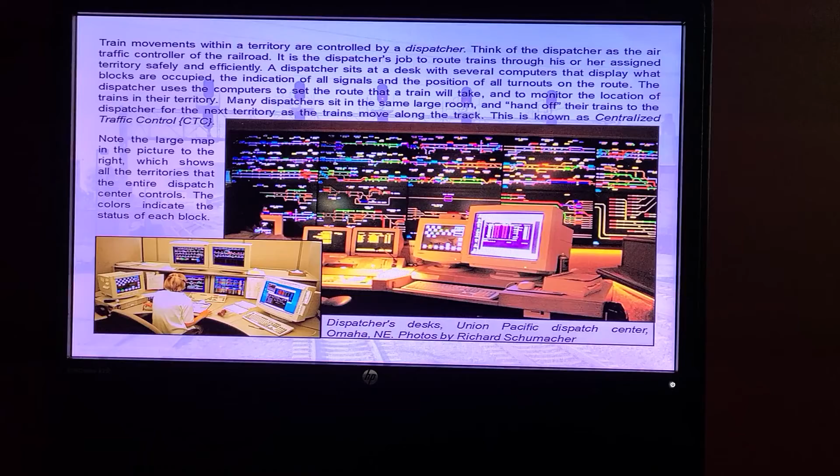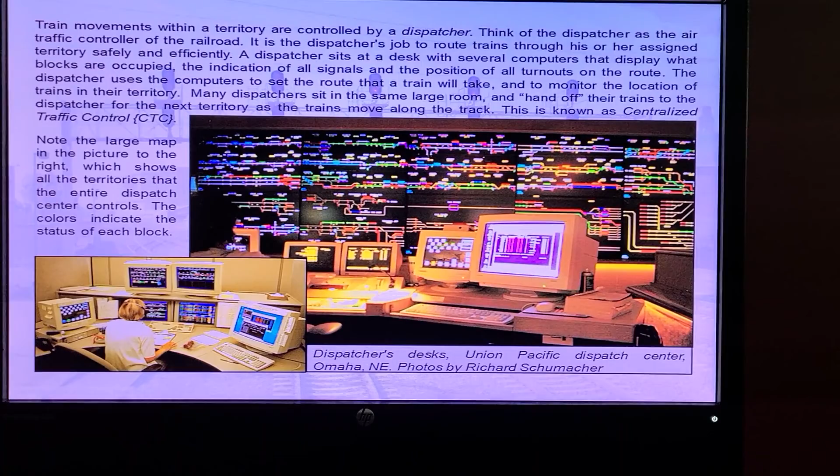Trains are controlled by a dispatcher. Think of the dispatcher as the air traffic controller of the railroad. It is the dispatcher's job to route trains through his or her assigned territory safely and efficiently. A dispatcher sits at a desk with several computers that display what blocks are occupied, the indication of all signals, and the position of all turnouts on the route. The dispatcher uses the computers to set the route that a train will take and to monitor the location of trains in their territory. Many dispatchers sit in the same large room and hand off their trains to the dispatcher for the next territory as the trains move along the track.

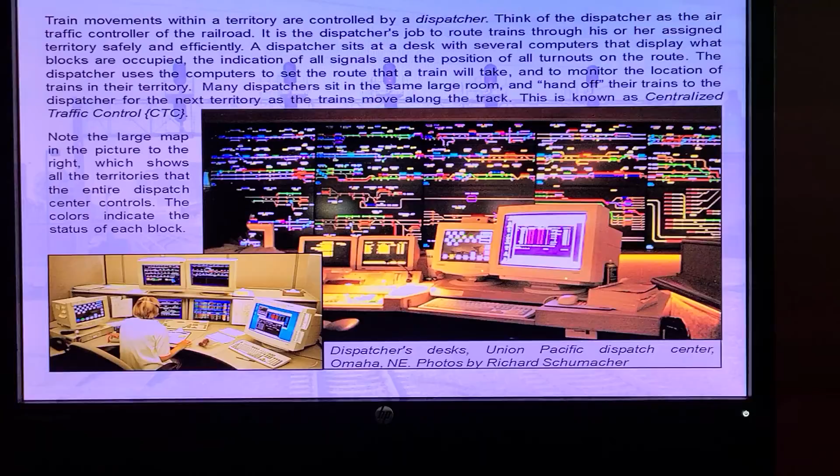This is known as centralized traffic control. Note the large map in the picture to the right, which shows all the territories that the entire dispatch center controls. The colors indicate the status of each block.

On less congested routes, or on routes with very long blocks or few diverging tracks, one or both of the following may be used to control train movements. In automatic block signaling, or ABS territory, signals are used, but they are controlled only by the presence or absence of a train in the block or blocks ahead. Some territory may not have signals at all. This is referred to as dark territory.

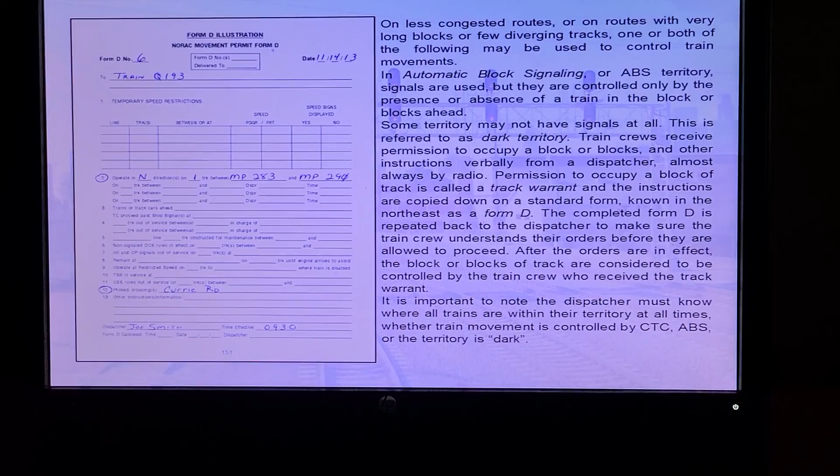Train crews receive permission to occupy a block or blocks and other instructions verbally from a dispatcher, almost always by radio. Permission to occupy a block of track is called a track warrant, and the instructions are copied down on a standard form known in the Northeast as a Form D. The completed Form D is repeated back to the dispatcher to make sure the train crew understands their orders before they are allowed to proceed.

After the orders are in effect, the block or blocks of track are considered to be controlled by the train crew who received the track warrant. It is important to note that the dispatcher must know where all trains are within their territory at all times, whether train movement is controlled by CTC, ABS, or the territory is dark.

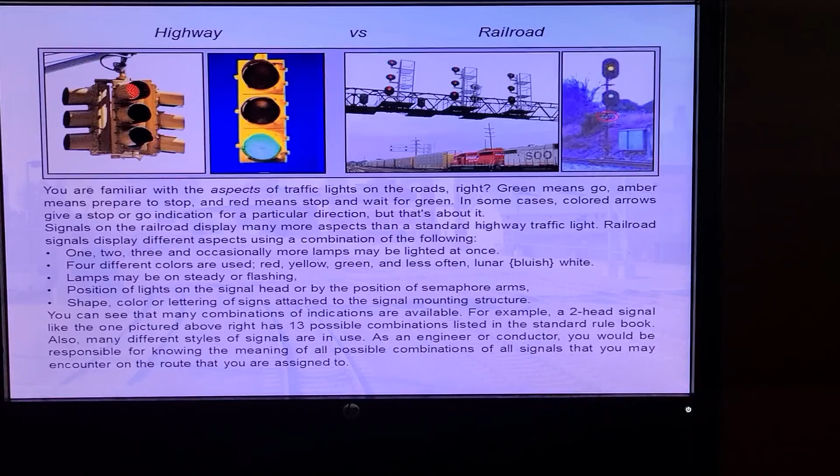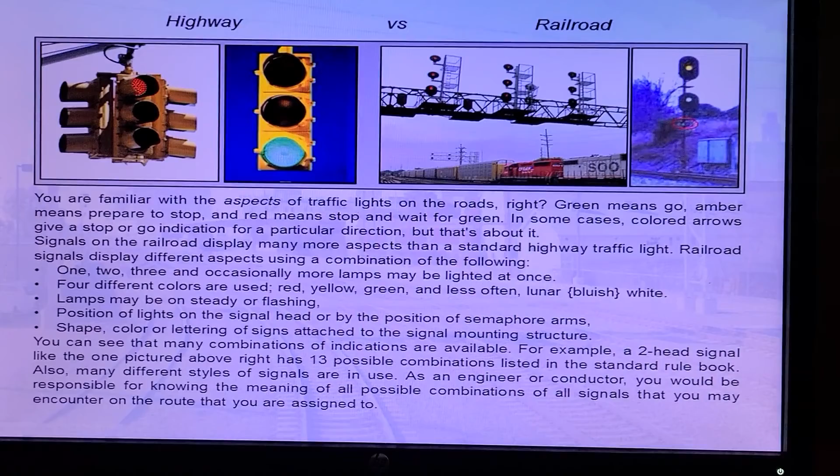You are familiar with the aspects of traffic lights on the roads, right? Green means go, amber means prepare to stop, and red means stop and wait for green. In some cases, colored arrows give a stop or go indication for a particular direction, but that's about it. Signals on the railroad display many more aspects than a standard highway traffic light.

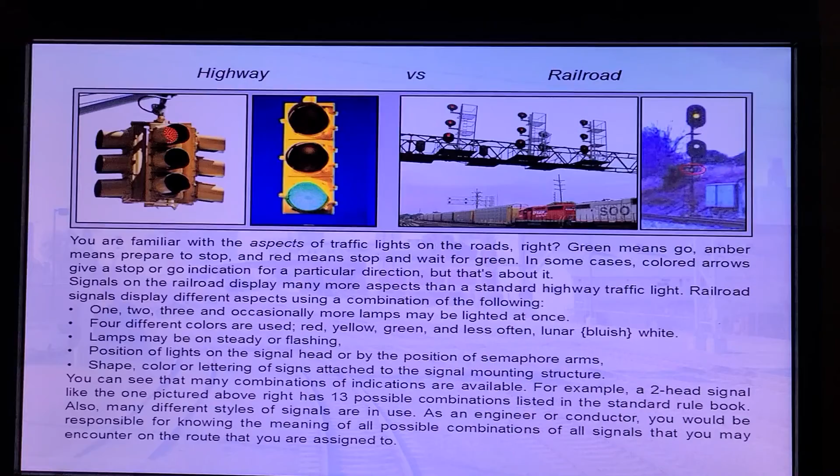Railroad signals display different aspects using a combination of the following: one, two, three, and occasionally more lamps may be lighted at once. Four different colors are used: red, yellow, green, and less often lunar white. Lamps may be on steady or flashing. Position of lights on the signal head or by position of semaphore arms. Shape, color, or lettering of signs attached to the signal mounting structure. You can see that many combinations of indications are available.

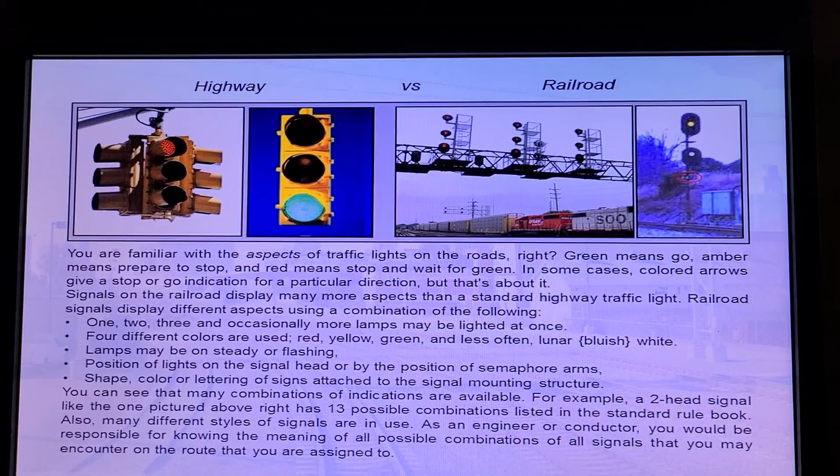For example, a two-head signal like the one pictured above right has 13 possible combinations listed in the standard rulebook. Also, many different styles of signal are in use. As an engineer or conductor, you would be responsible for knowing the meaning of all possible combinations of all signals that you may encounter on the route that you are assigned to.

Speed limits are important for safe operation of trains, just as they are important for safe operation of cars on the roadways. Safe speed limits on streets and highways are calculated by the engineers designing the road and apply to all types of vehicles using it. Speed limits on the railroad, however, are variable.

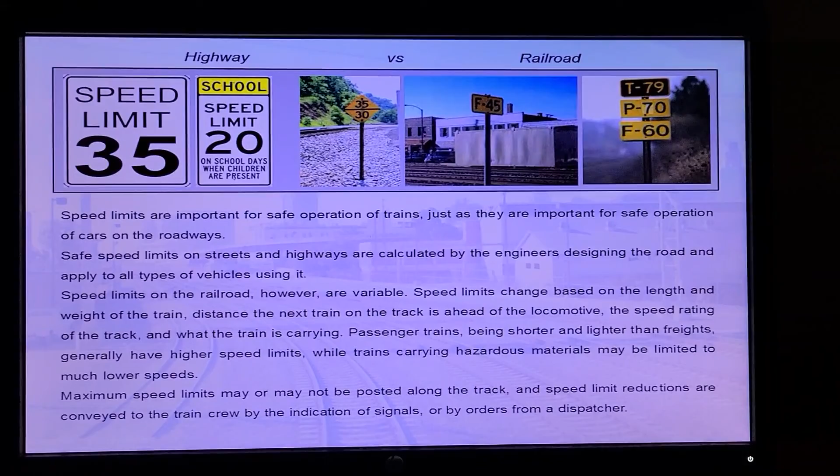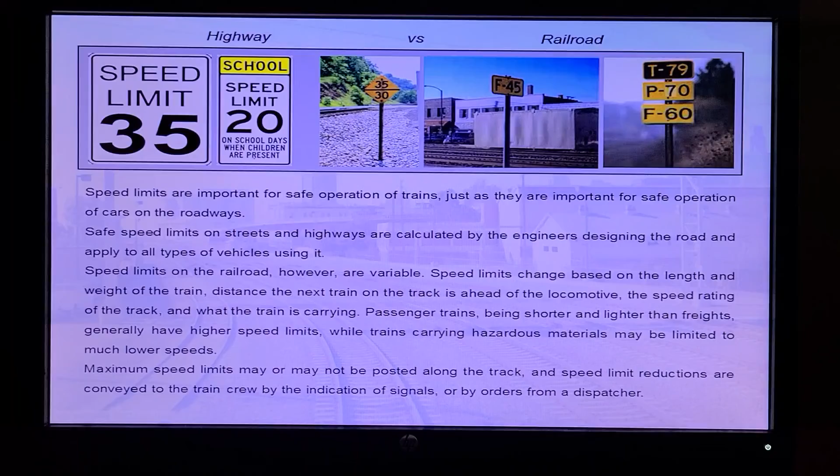Speed limits change based on the length and weight of the train, distance the next train on the track is ahead of the locomotive, the speed rating of the track, and what the train is carrying. Passenger trains, being shorter and lighter than freights, generally have higher speed limits, while trains carrying hazardous materials may be limited to much lower speeds. Maximum speed limits may or may not be posted along the track, and speed limit reductions are conveyed to the train crew by the indication of signals or by orders from a dispatcher.

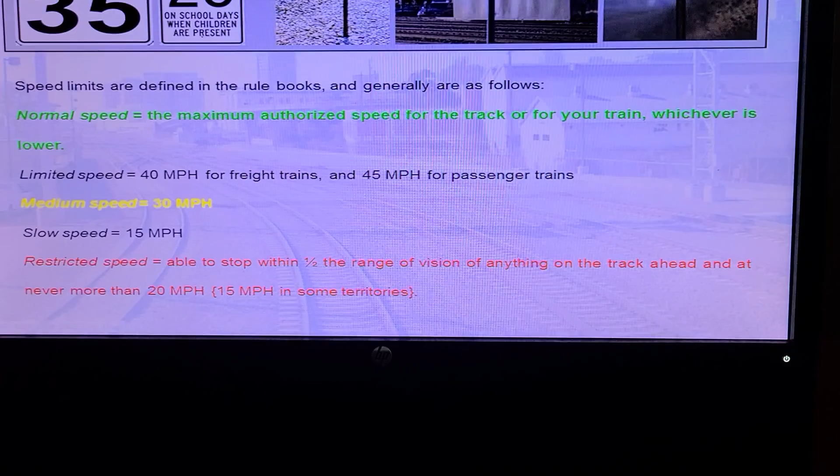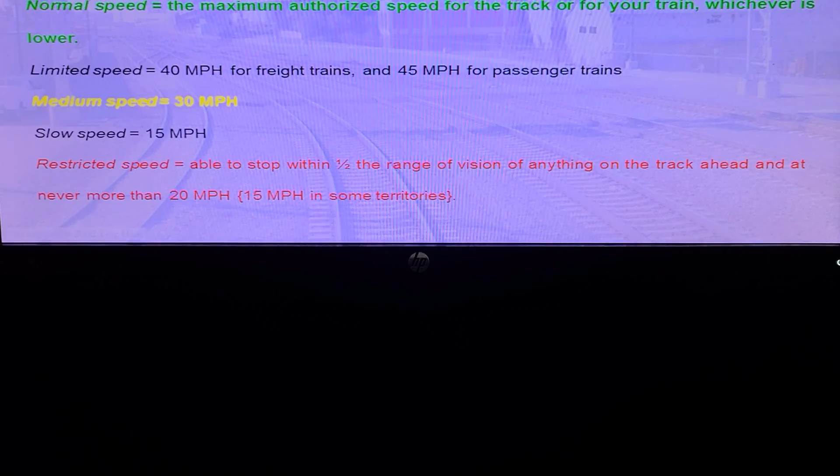Train speeds are defined in the rule books and generally are as follows. Normal speed is the maximum authorized speed for the track or your train, whichever is slower. Limited speed equals 40 miles per hour for freight trains and 45 miles per hour for passenger trains. Medium speed is 30 miles per hour. Slow speed is defined as 15 miles per hour. And restricted speed tells the engineer that he must be able to stop within half the range of vision of anything on the track ahead, and never more than 20 miles per hour, or 15 in some territories.

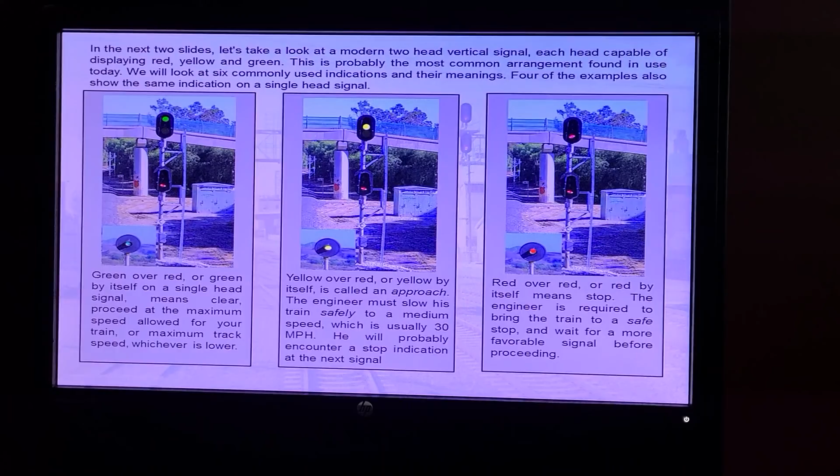In the next two slides, let's take a look at a modern two-head vertical signal, each head capable of displaying red, yellow, and green. This is probably the most common arrangement found in use today. We will look at six commonly used indications and their meanings. Four of the examples also show the same indication on a single head signal.

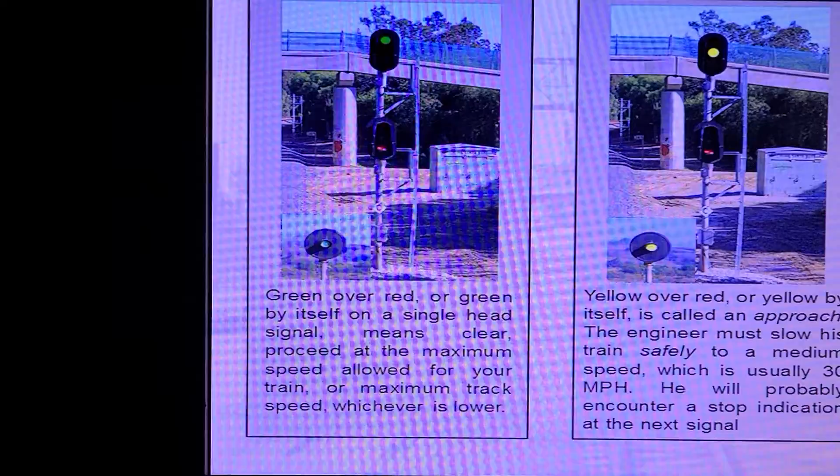Green over red, or green by itself on a single head signal, means clear. Proceed at the maximum speed allowed for your train, or maximum track speed, whichever is lower.

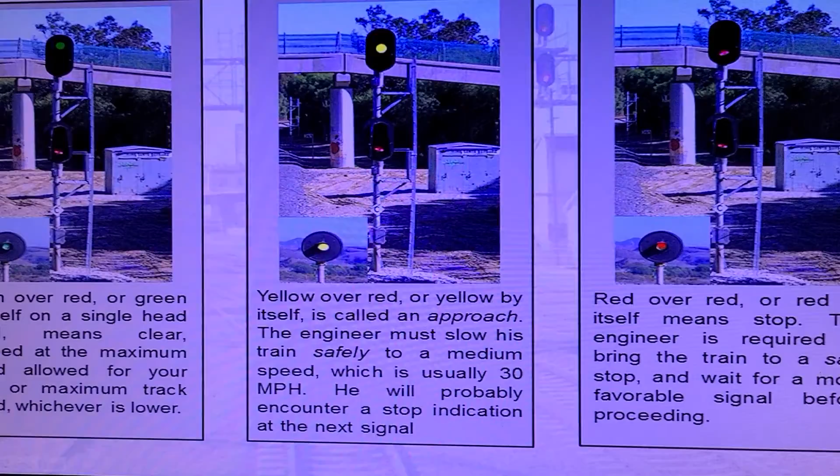Yellow over red, or yellow by itself, is called an approach. The engineer must slow his train safely to a medium speed, which is usually 30 miles per hour. He will probably encounter a stop indication at the next signal.

Red over red, or red by itself, means stop. The engineer is required to bring the train to a safe stop and wait for a more favorable signal before proceeding.

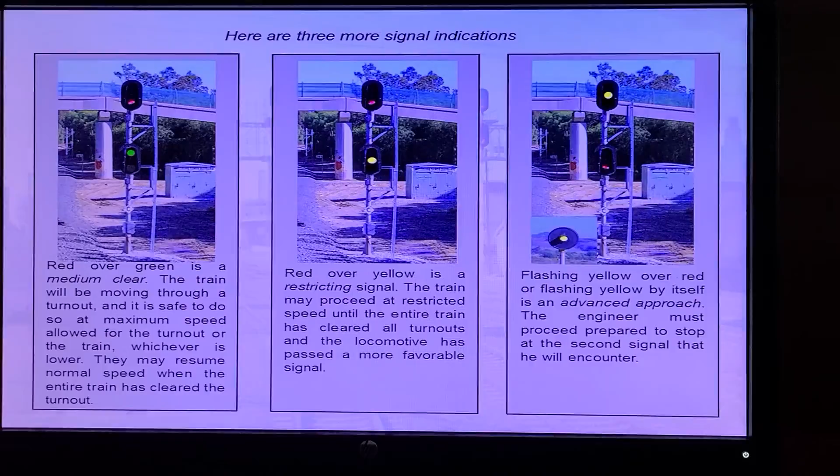Here are three more signal indications. Red over green is a medium clear. The train will be moving through a turnout, and it is safe to do so at maximum speed allowed for the turnout or the train, whichever is lower. They may resume normal speed when the entire train has cleared the turnout.

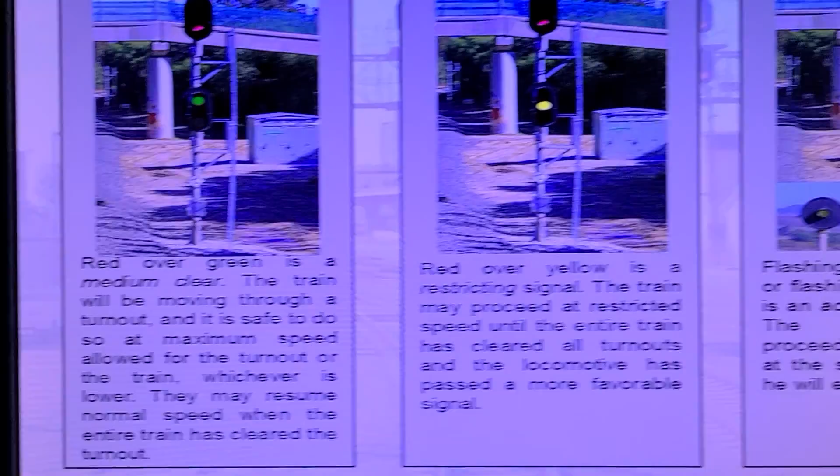Red over yellow is a restricting signal. The train may proceed at restricted speed until the entire train has cleared all turnouts and the locomotive has passed a more favorable signal. Flashing yellow over red, or flashing yellow by itself, is an advanced approach. The engineer must proceed prepared to stop at the second signal that he will encounter.

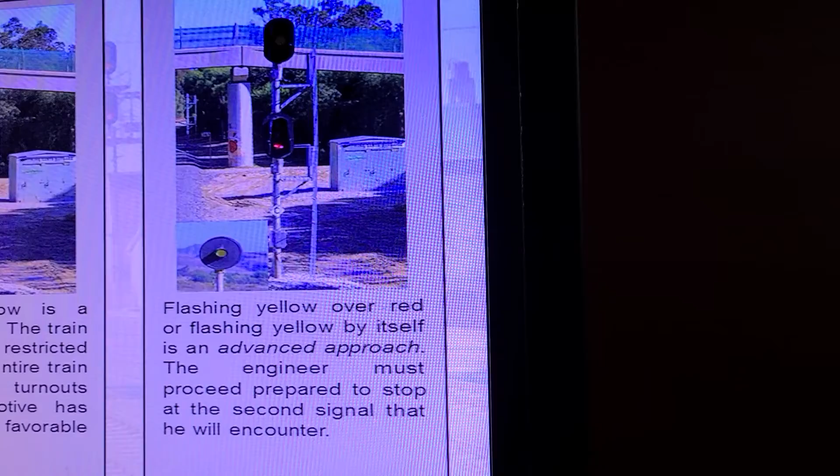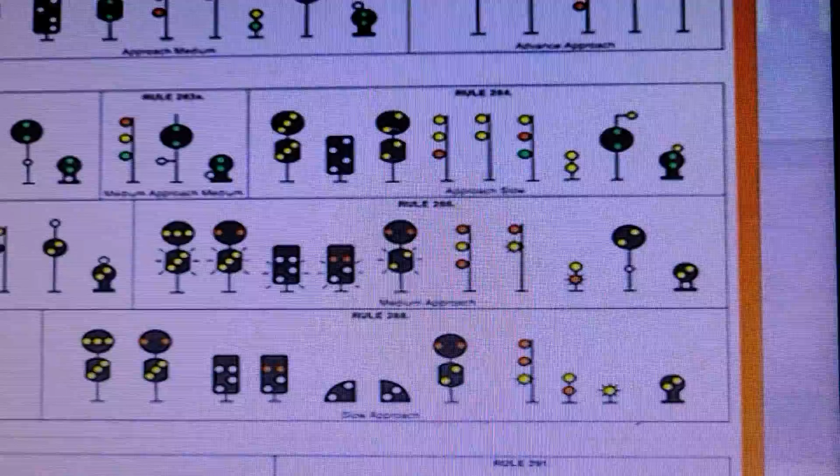So far, we have only seen six indications from a two-head vertical signal. This chart shows diagrams of the many different signal styles in use and the different indications commonly used on Northeast railroads. Imagine having to know all these to drive your car. Members of a train crew need to learn the indications of all signal types they will encounter and their meaning as part of their certification process.

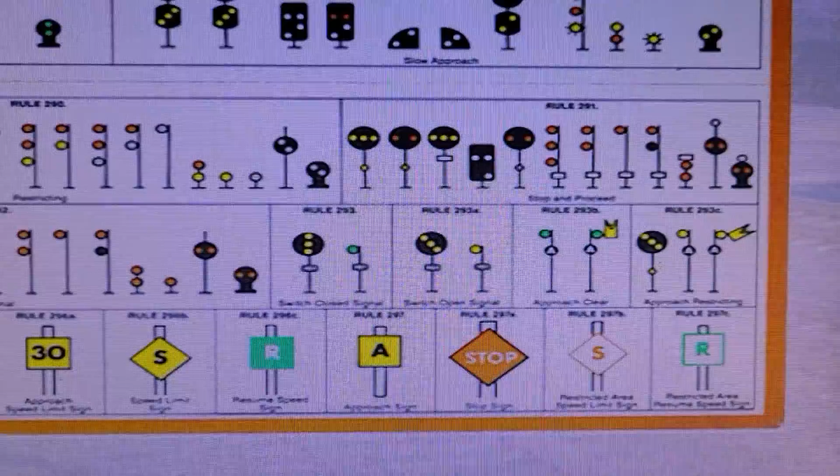Let's take a look at some different styles of signals used by the railroads throughout history. One of the earliest styles of trackside signal was simply a large, brightly colored ball tied to a rope or chain, which ran through a pulley on top of a pole so it could be raised and lowered. These signals occasionally were fitted with lanterns or flags. These were coming into common use in the 1830s.

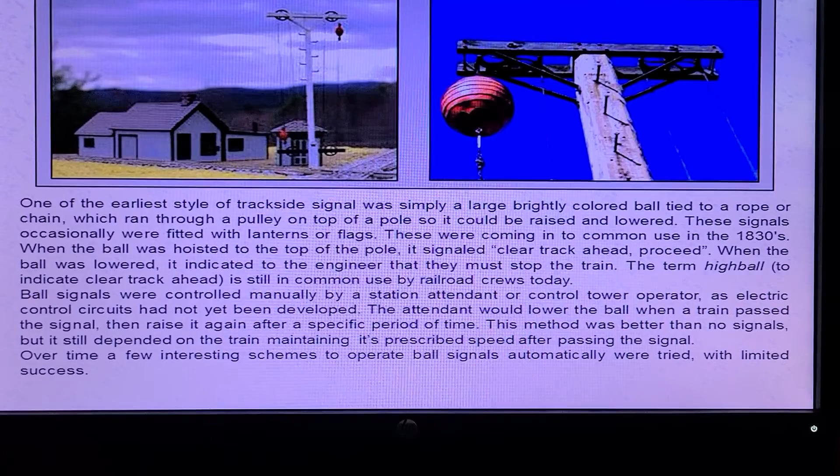When the ball was hoisted to the top of the pole, it signaled clear track ahead, proceed. When the ball was lowered, it indicated to the engineer that they must stop the train. The term highball to indicate clear track ahead is still in common use by railroad crews today.

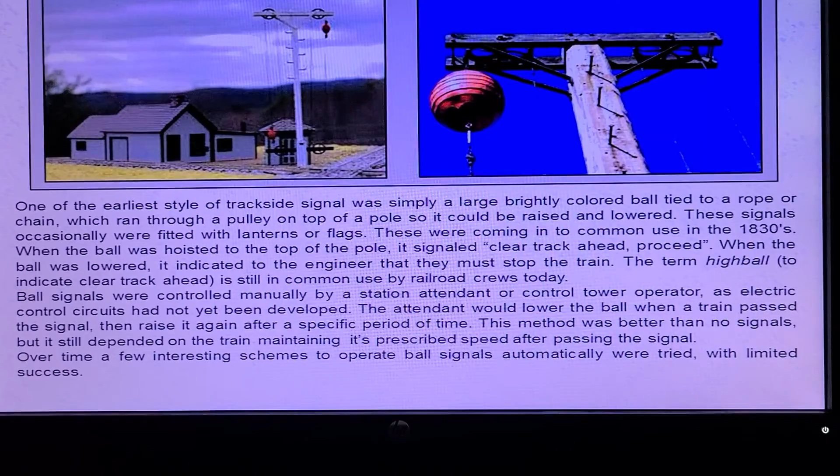Ball signals were controlled manually by a station attendant or control tower operator, as electric control circuits had not yet been developed. The attendant would lower the ball when a train passed the signal, then raise it again after a specific period of time. This method was better than no signals, but it still depended on the train maintaining its prescribed speed after passing the signal. Over time, a few interesting schemes to operate ball signals automatically were tried with limited success.

The first electrically operated signal was the Hall disc signal, or banjo. Patented in 1867, this signal housed a metal hoop with red cloth stretched over it, which was attached inside a wooden banjo-shaped case in such a way as to allow it to swivel.

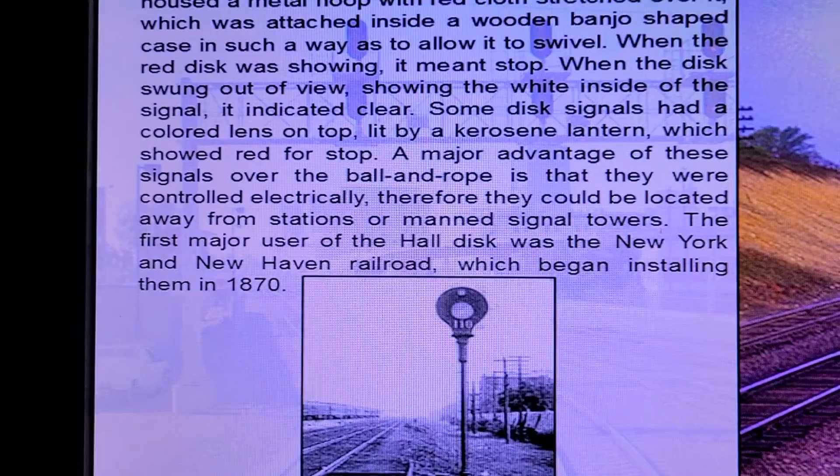When the red disc was showing, it meant stop. When the disc swung out of view, showing the white inside of the signal, it indicated clear. Some disc signals had a colored lens on top lit by a kerosene lantern, which showed red for stop.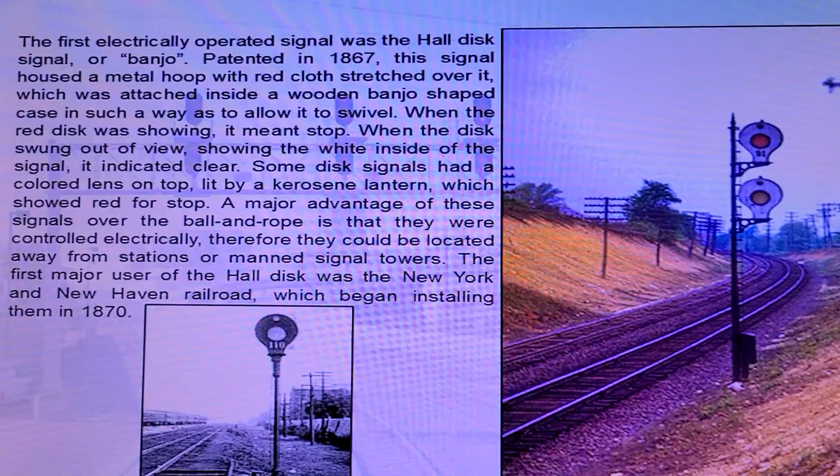A major advantage of these signals over the ball and rope is that they were controlled electrically, therefore they could be located away from stations or manned signal towers. The first major user of the Hall disc was the New York and New Haven Railroad, which began installing them in 1870.

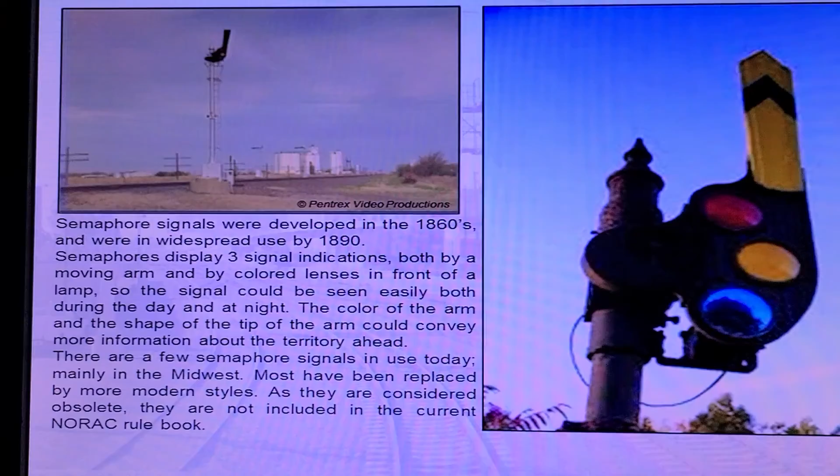Semaphore signals were developed in the 1860s and were in widespread use by 1890. Semaphores display three signal indications, both by a moving arm and by colored lenses in front of a lamp, so the signal could be easily seen both during the day and at night. The color of the arm and the shape of the tip of the arm could convey more information about the territory ahead. There are a few semaphore signals in use today, mainly in the Midwest.

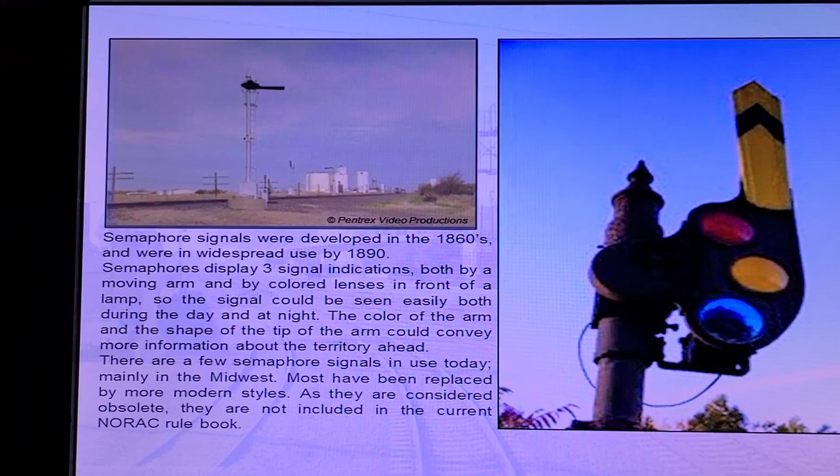Most have been replaced by more modern styles. As they are considered obsolete, they are not included in the current NORAC rulebook.

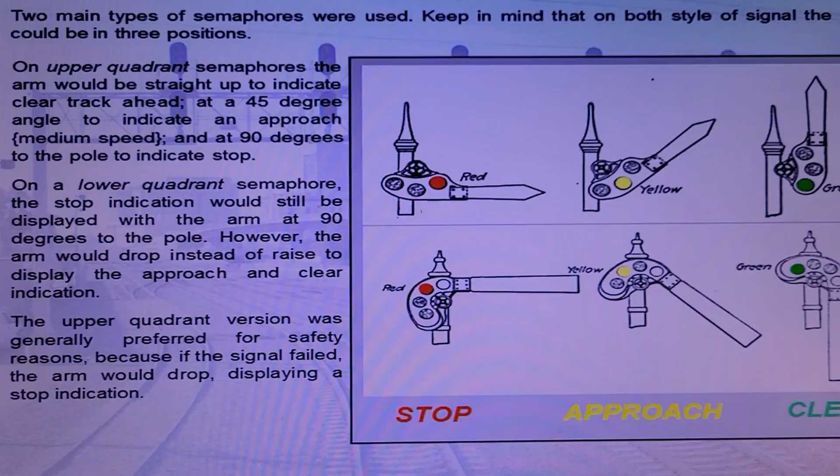Two main types of semaphores were used. Keep in mind that on both styles of signal, the arm could be in three positions. On upper quadrant semaphores, the arm would be straight up to indicate clear track ahead, at a 45-degree angle to indicate an approach or medium speed, and at 90 degrees to the pole to indicate stop.

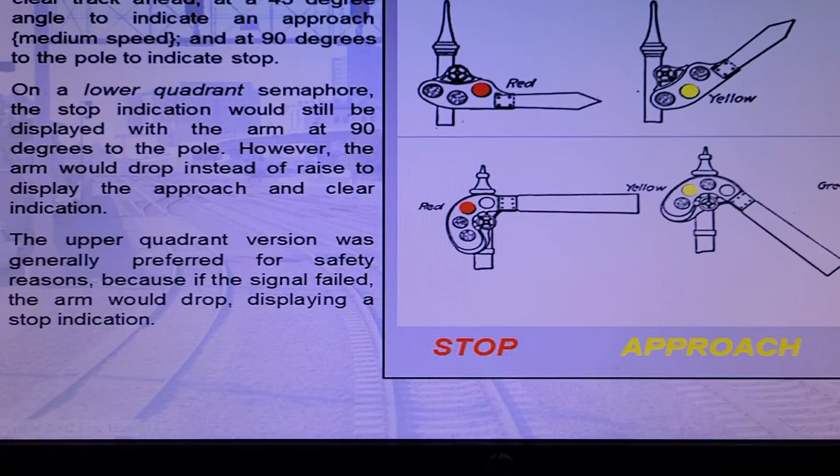On a lower quadrant semaphore, the stop indication would still be displayed with the arm at 90 degrees to the pole. However, the arm would drop instead of raise to display the approach and clear indication. The upper quadrant version was generally preferred for safety reasons because if the signal failed, the arm would drop, displaying a stop indication.

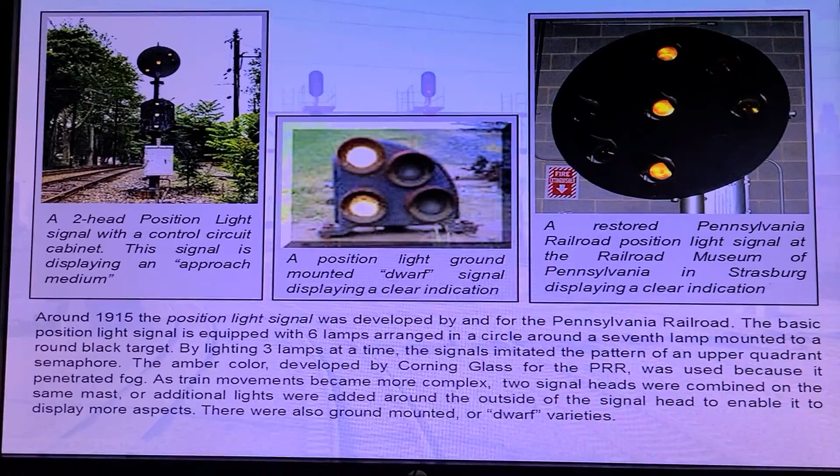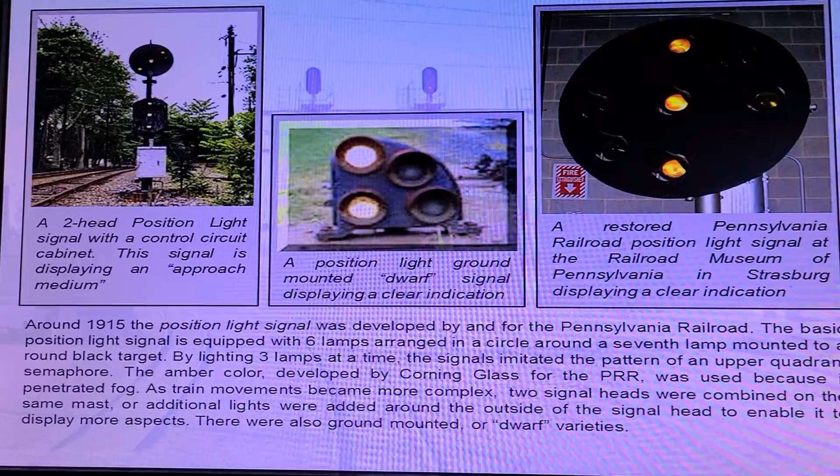Around 1915, the position light signal was developed by and for the Pennsylvania Railroad. The basic position light signal is equipped with 6 lamps arranged in a circle around a 7th lamp mounted to a round black target. By lighting 3 lamps at a time, the signals imitated the pattern of an upper quadrant semaphore. The amber color, developed by Corning Glass for the Pennsylvania Railroad, was used because it penetrated fog.

As train movements became more complex, 2 signal heads were combined on the same mast, or additional lights were added around the outside of the signal head to enable it to display more aspects. There were also ground-mounted or dwarf varieties.

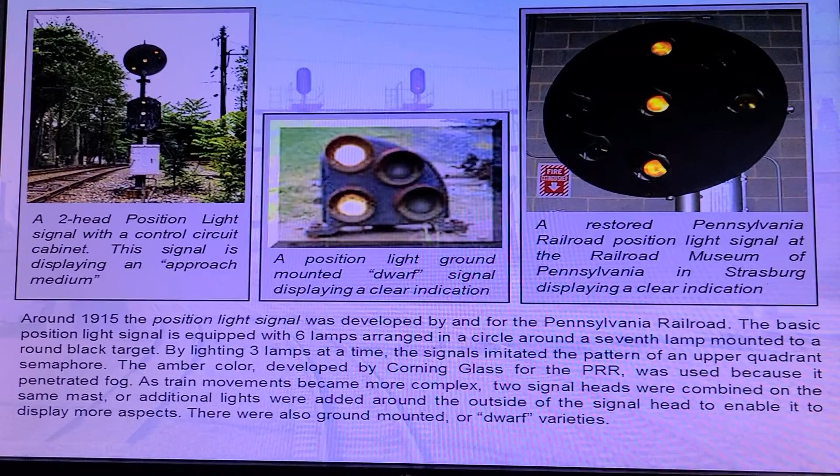A very similar signal eliminated the center lamp and used colored lamps around the outside of the target, creating what rail fans call color position signals. These were developed around 1920.

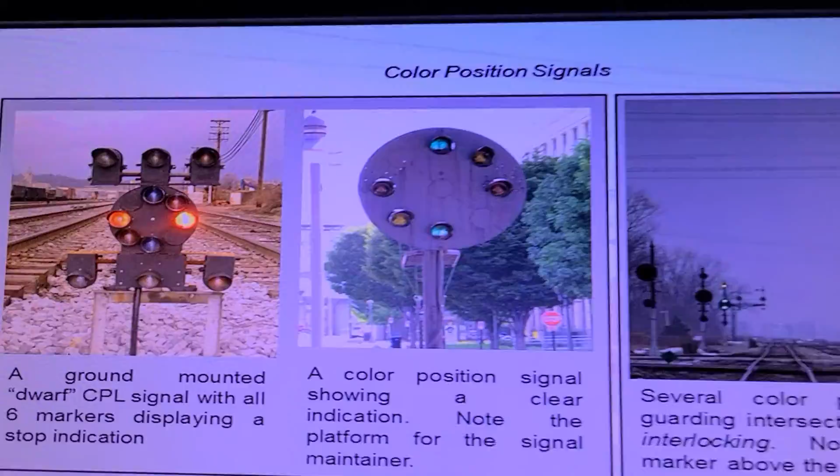The first major user of color position signals was the Baltimore and Ohio, and many can be seen today, especially on Amtrak territory in the Northeast Corridor. Up to 6 lamps, known as markers, were added around the outside as desired. As other railroads took over former Pennsylvania Railroad trackage, many position light signals were easily converted to this style.

The General Railway Signal Company of Rochester, New York, developed the triangular colored light signal, which was one of the first widely used high-intensity light signals. The GRS Type G, or tri-lights, were widely installed by the New York Central and the Seaboard system, and later Conrail and New Jersey Transit adopted this signal.

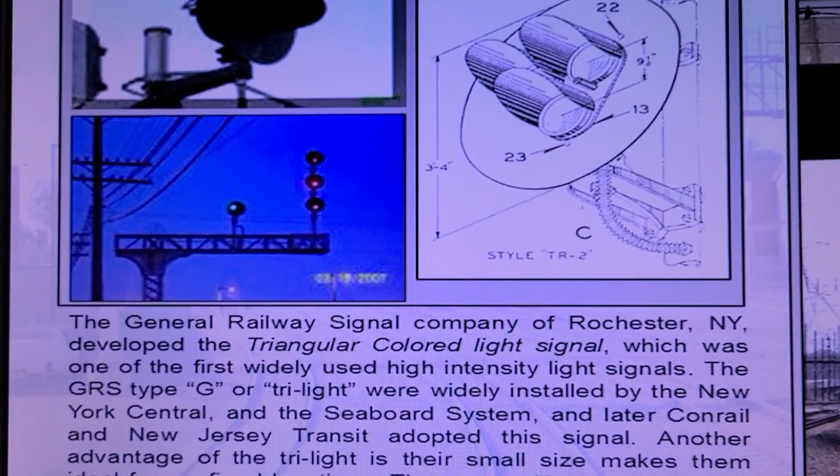Another advantage of the tri-light is their small size makes them ideal for confined locations. There are still a good many of these in use in the Northeast United States, including upstate New York.

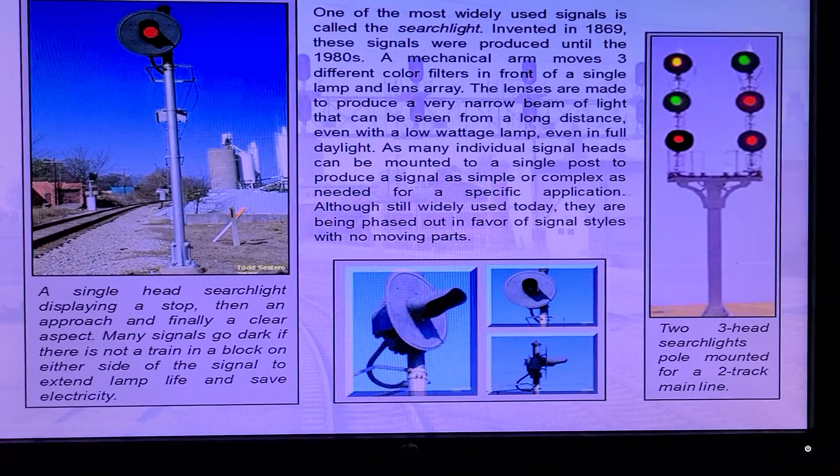One of the most widely used signals is called the Searchlight. Invented in 1869, these signals were produced until the 1980s. A mechanical arm moves 3 different color filters in front of a single lamp and lens array. The lenses are made to produce a very narrow beam of light that can be seen from a long distance, even with a low wattage lamp, even in full daylight.

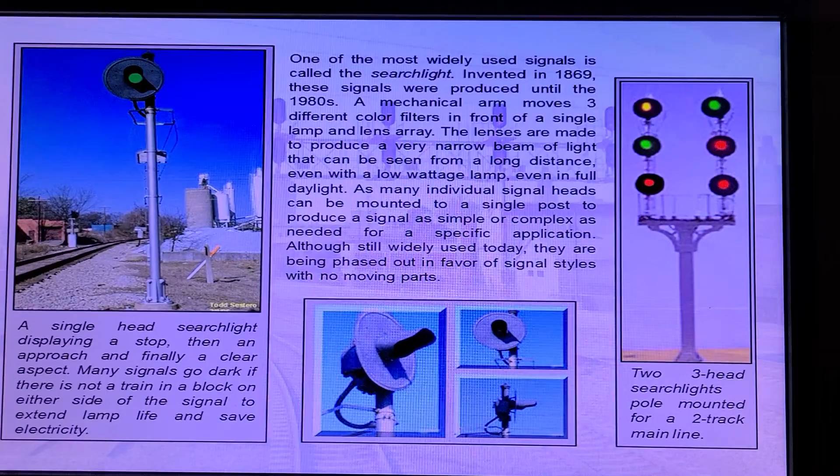As many individual signal heads can be mounted to a single post to produce a signal as simple or complex as needed for a specific application. Although still widely used today, they are being phased out in favor of signal styles with no moving parts.

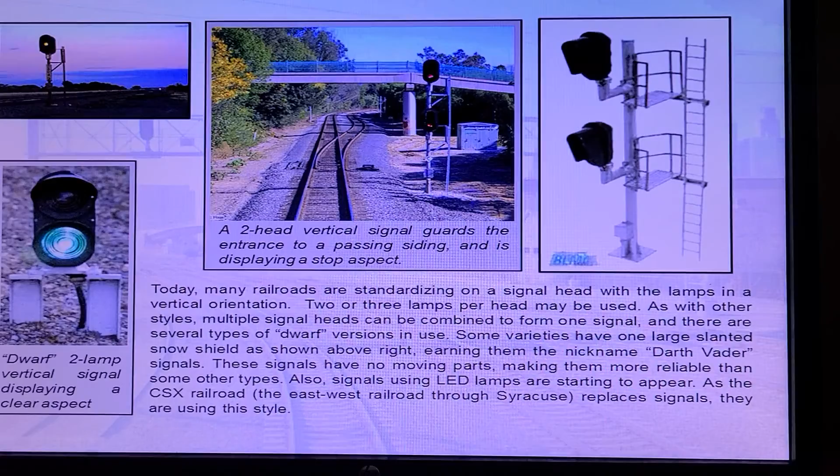Today, many railroads are standardizing on a signal head with the lamps in a vertical orientation. 2 or 3 lamps per head may be used. As with other styles, multiple signal heads can be combined to form one signal, and there are several types of dwarf versions in use. Some varieties have one large slanted snow shield, earning them the nickname Darth Vader signals. These signals have no moving parts, making them more reliable than some other types.

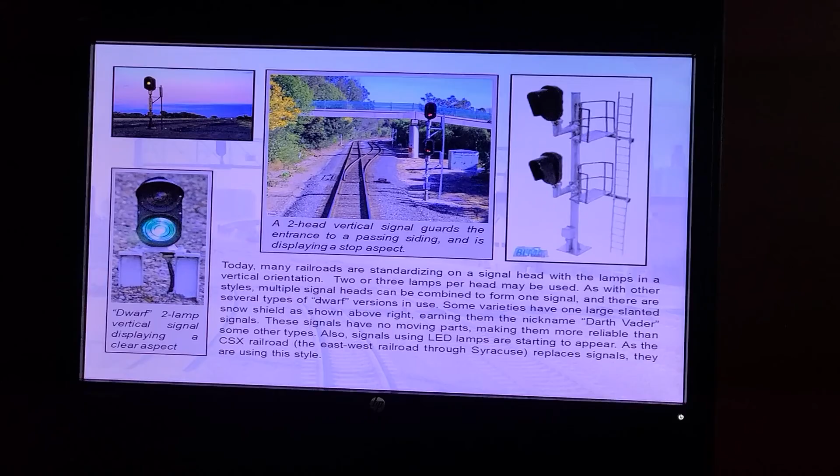Also, signals using LED lamps are starting to appear. As the CSX Railroad, the East-West Railroad through Syracuse, replaces signals, they are using this style.

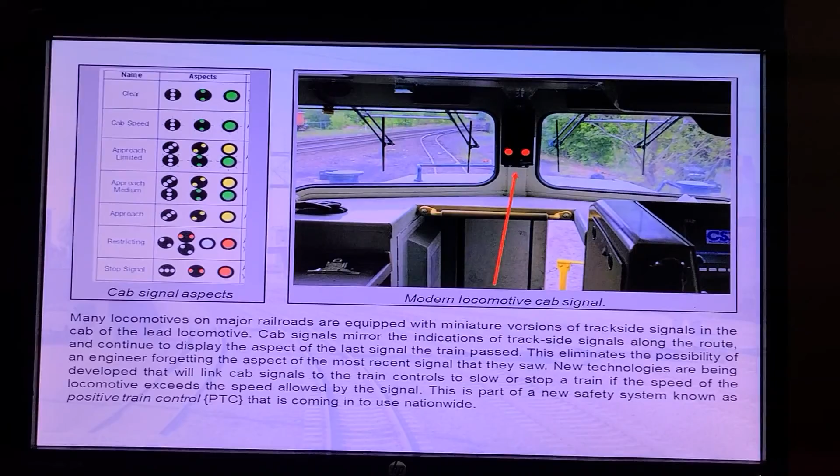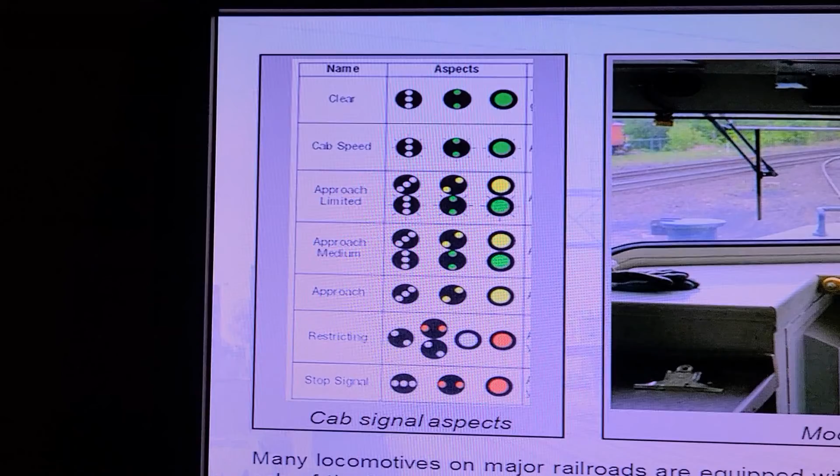Many locomotives on major railroads are equipped with miniature versions of trackside signals in the cab of the lead locomotive. Cab signals mirror the indication of trackside signals along the route and continue to display the aspect of the last signal the train passed. This eliminates the possibility of an engineer forgetting the aspect of the most recent signal that they saw.

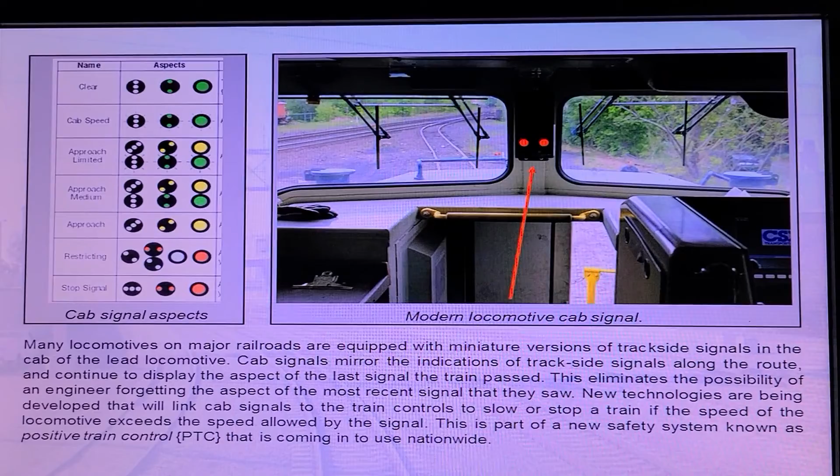New technologies are being developed that will link cab signals into the train controls to slow or stop a train if the speed of the locomotive exceeds the speed allowed by the signal. This is part of a new safety system known as Positive Train Control, or PTC, that is coming into use nationwide.

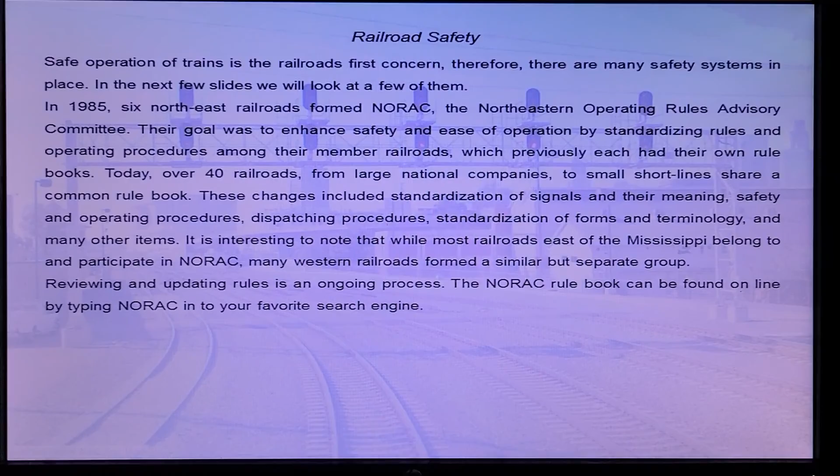Safe operation of trains is the railroad's first concern. Therefore, there are many safety systems in place. In the next few slides, we will look at a few of them.

In 1985, 6 Northeast railroads formed NORAC, the Northeastern Operating Rules Advisory Committee. Their goal was to enhance safety and ease of operation by standardizing rules and operating procedures among their member railroads, which previously each had their own rule books. Today, over 40 railroads, from large national companies to small short lines, share a common rule book.

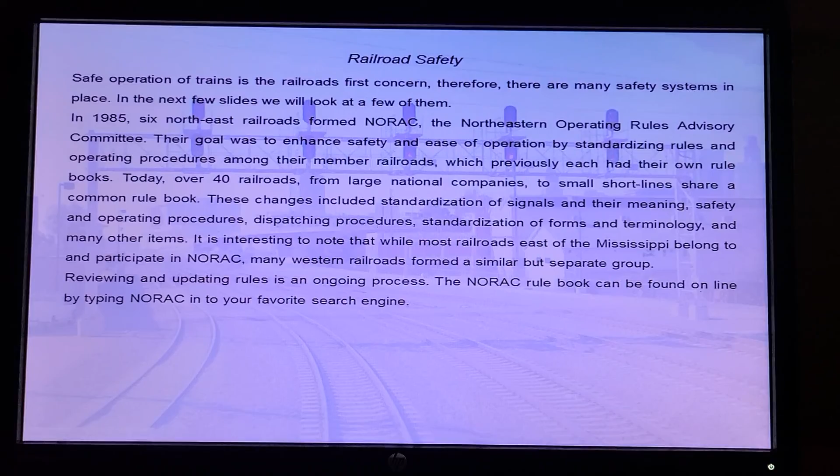These changes included standardization of signals and their meanings, safety and operating procedures, dispatching procedures, standardization of forms and terminology, and many other items. It is interesting to note that while most railroads east of the Mississippi belong to and participate in NORAC, many western railroads formed a similar but separate group.

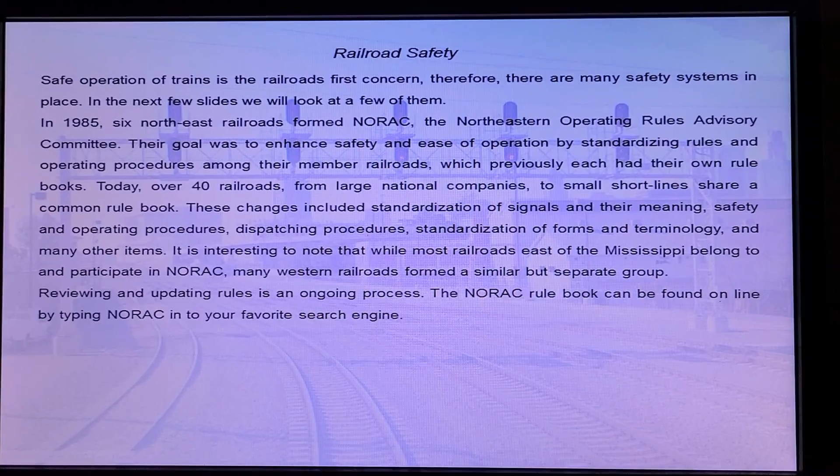Reviewing and updating rules is an ongoing process. The NORAC rulebook can be found online by typing NORAC into your favorite search engine.

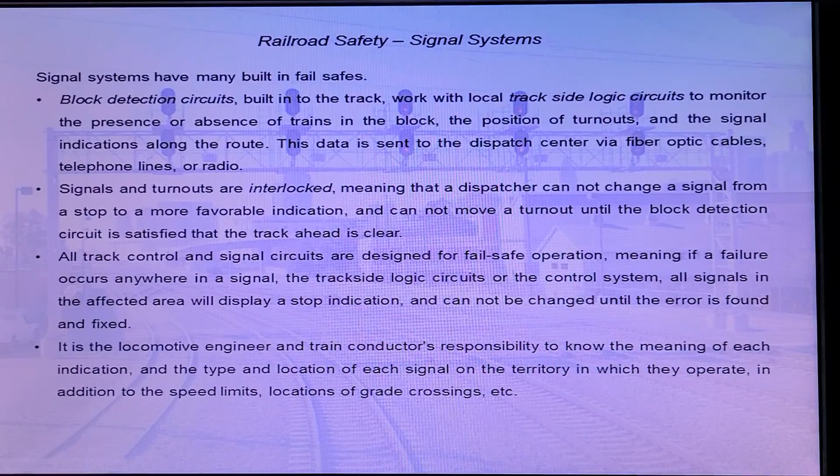Signal systems have many built-in fail-safes. Block detection circuits, built into the track, work with local trackside logic circuits to monitor the presence or absence of trains in the block, the position of turnouts, and the signal indications along the route. This data is sent to the dispatch center via fiber optic cables, telephone lines, or radio.

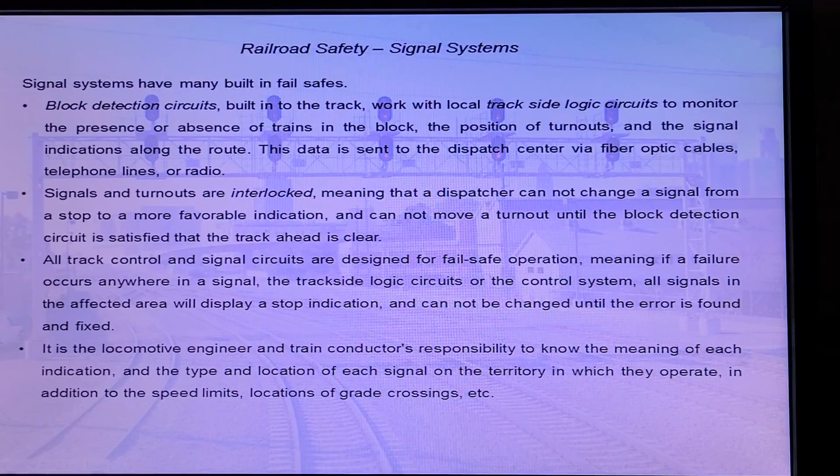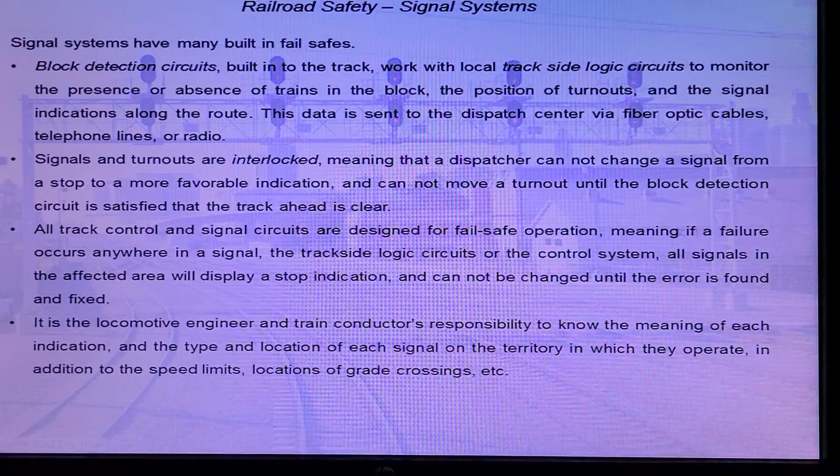Signals and turnouts are interlocked, meaning that a dispatcher cannot change a signal from a stop to a more favorable indication and cannot move a turnout until the block detection circuit is satisfied that the track ahead is clear. All track control and signal circuits are designed for fail-safe operation, meaning if a failure occurs anywhere in the signal, the trackside logic circuit, or the control system, all signals in the affected area will display a stop indication and cannot be changed until the error is found and fixed.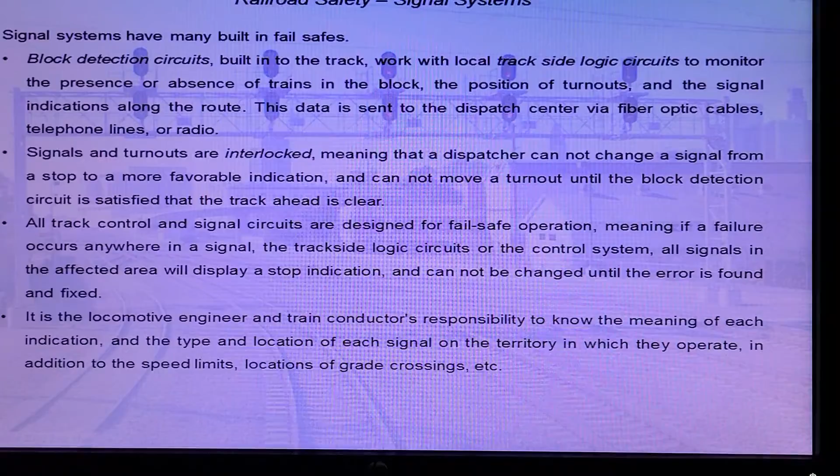It is the locomotive engineer and train conductor's responsibility to know the meaning of each indication and the type and location of each signal on the territory in which they operate, in addition to the speed limits, location of grade crossings, etc.

CSX Equipment Defect Detector, Milepost 2-9er 1.9er, Track 2, no defects. No defects. Total axle 364, speed 15. End of transmission.

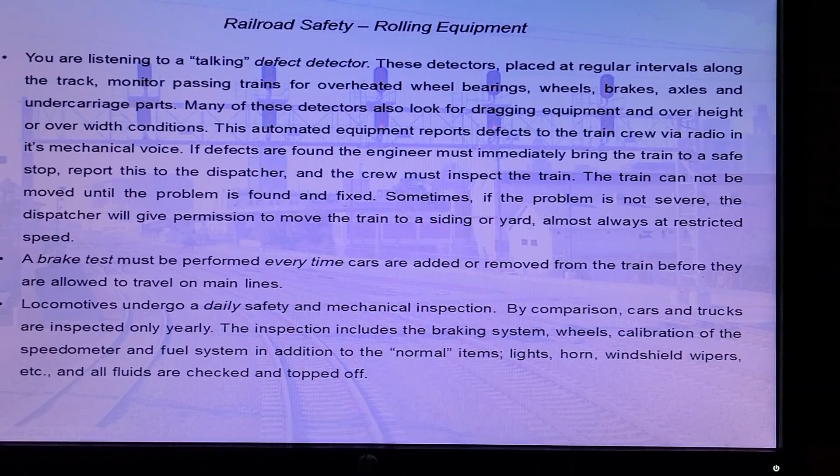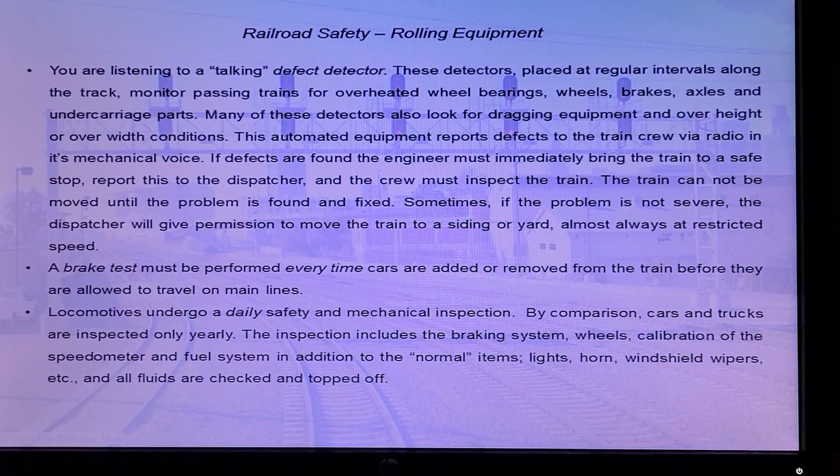You are listening to a talking defect detector. These detectors, placed at regular intervals along the track, monitor passing trains for overheated wheel bearings, wheels, brakes, axles, and undercarriage parts. Many of these detectors also look for dragging equipment and over height or over width conditions. This automated equipment reports defects to the train crew via radio in its mechanical voice.

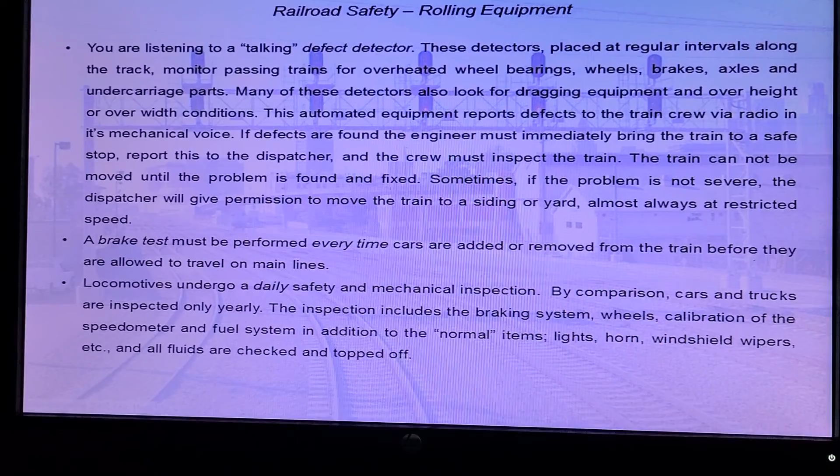If defects are found, the engineer must immediately bring the train to a safe stop, report this to the dispatcher, and the crew must inspect the train. The train cannot be moved until the problem is found and fixed. Sometimes, if the problem is not severe, the dispatcher will give permission to move the train to a siding or yard, almost always at restricted speed.

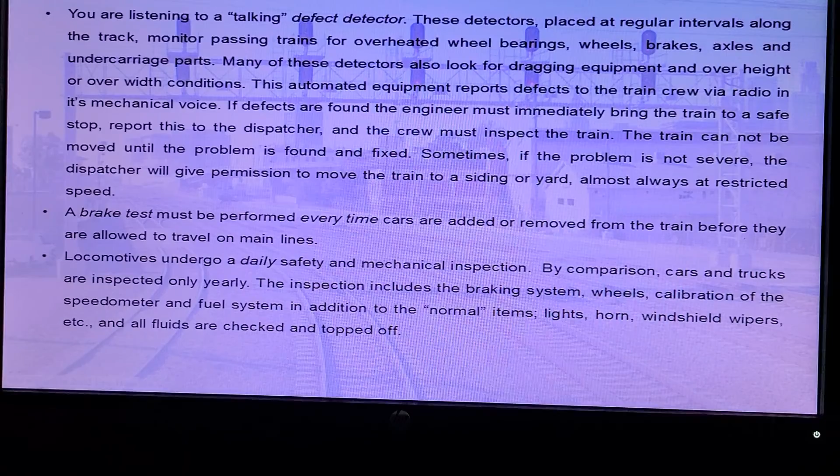A brake test must be performed every time cars are added or removed from the train before they are allowed to travel on main lines.

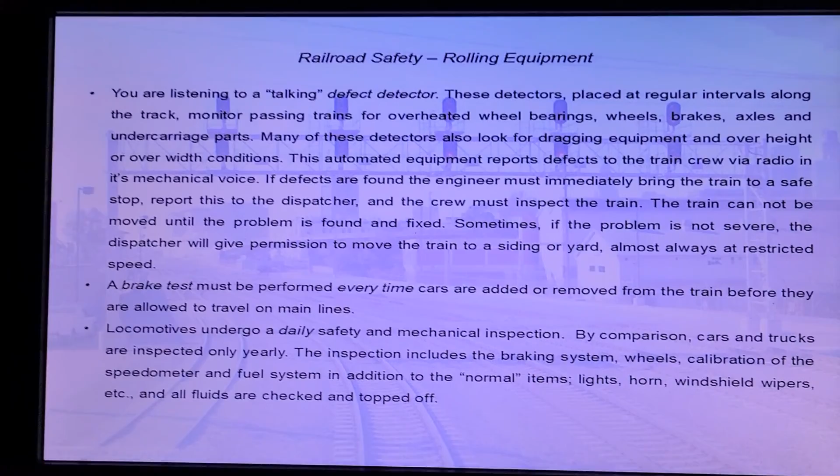Locomotives undergo a daily safety and mechanical inspection. By comparison, cars and trucks are inspected only yearly. The inspection includes the braking system, wheels, calibration of the speedometer, and fuel system in addition to the normal items, lights, horn, windshield wipers, etc., and all fluids are checked and topped off.

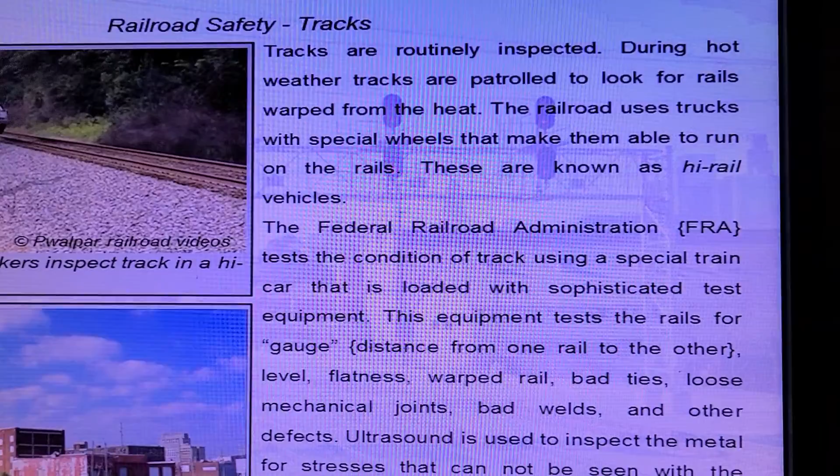Tracks are routinely inspected. During hot weather, tracks are patrolled to look for rails warped from the heat. The railroad uses trucks with special wheels that make them able to run on the rails. These are known as hi-rail vehicles.

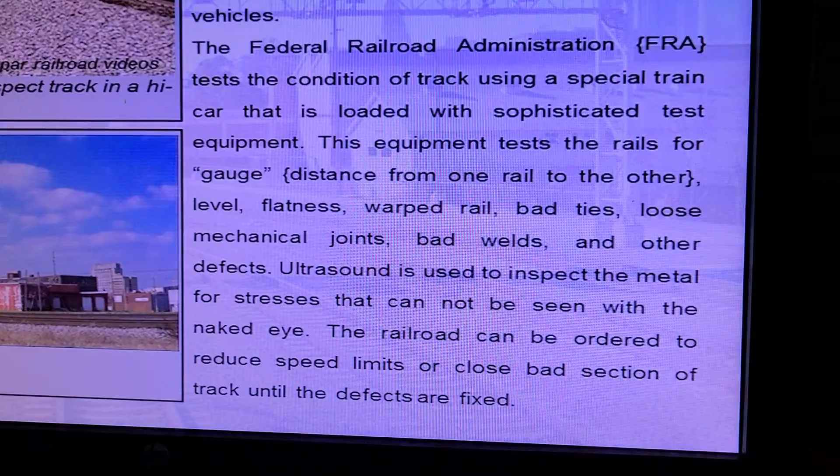The Federal Railroad Administration, or FRA, tests the condition of tracks using a special train car that is loaded with sophisticated test equipment. This equipment tests the rails for gauge, that's the distance from one rail to the other, level, flatness, warped rail, bad ties, loose mechanical joints, bad welds, and other defects. Ultrasound is used to inspect the metal for stresses that cannot be seen with the naked eye. The railroad can be ordered to reduce speed limits or close bad sections of track until the defects are fixed.

All railroad employees are required to strictly follow the rule book. It is essential that speed limits, signals, safety regulations, and train orders are strictly adhered to by trainmen. Maintenance of way workers, car and locomotive mechanics, yard hostlers, and inside personnel have their own regulations to follow. Railroad workers are trained and retrained in safe performance of their assigned duties.

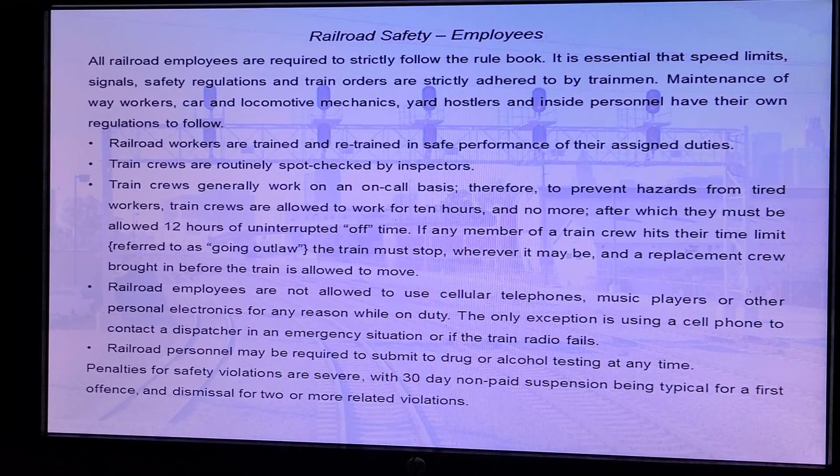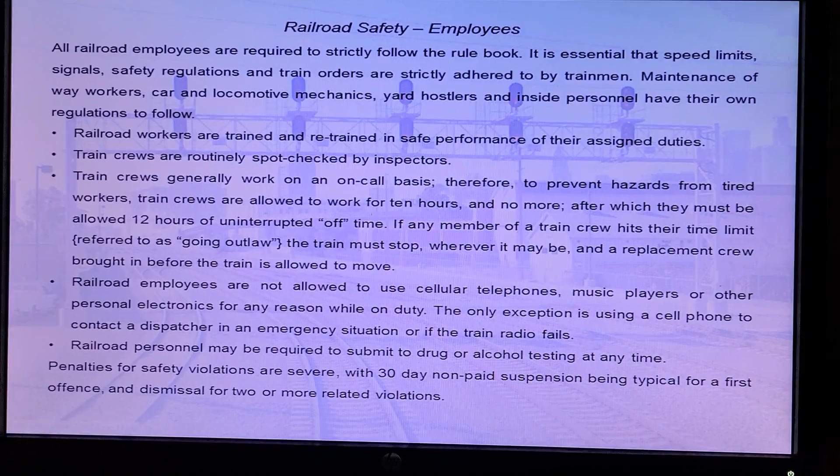Train crews are routinely spot checked by inspectors. Train crews generally work on an on-call basis. Therefore, to prevent hazards from tired workers, train crews are allowed to work for 10 hours and no more, after which they must be allowed 12 hours of uninterrupted off time. If any member of a train crew hits their time limit, referred to as going outlaw, the train must stop wherever it may be and a replacement crew brought in before the train is allowed to move.

Railroad employees are not allowed to use cellular telephones, music players, or other personal electronics for any reason while on duty. The only exception is using a cell phone to contact a dispatcher in an emergency situation or if the train radio fails.

Railroad personnel may be required to submit to drug or alcohol testing at any time. Penalties for safety violations are severe, with 30-day non-paid suspension being typical for a first offense and dismissal for 2 or more related violations.